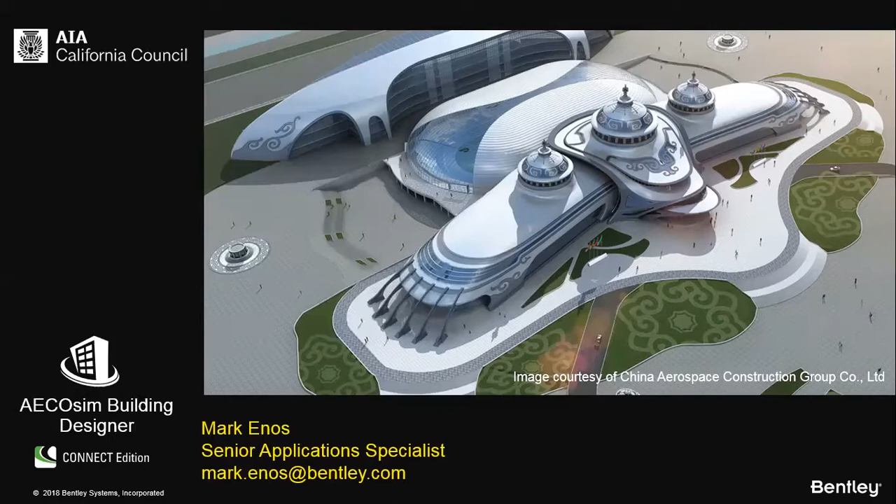So our member benefit program is pricing. It's open for new and existing users. For new users, you get 25% off. There is a select cost involved, which is maintenance, so you get 25% off. The list price is $5,501, so that brings it down to $4,126. And then if you buy two and get one, you do pay the select on all three for the maintenance. So that's for new or existing users for that whopping discount of over $5,000.

With that select maintenance, that includes 24/7 technical support. You get free software upgrades. All of our online training on demand is complimentary for all Bentley products, so if there are products you just want to play around with, you can go into the training. We also have complimentary instructor-led virtual classes for AECOsim, which is our BIM product, that are AIA continuing education registered. That's only for the live classes, but all those quick starts are offered on demand.

Part of Select, you also get a version of LumenRT Designer, which I'll be showing in a few moments, that is embedded in AECOsim Building Designer. You also have the benefits of our connected services with project collaboration, adaptive learning, and personal mobility, which you'll be seeing in a little bit.

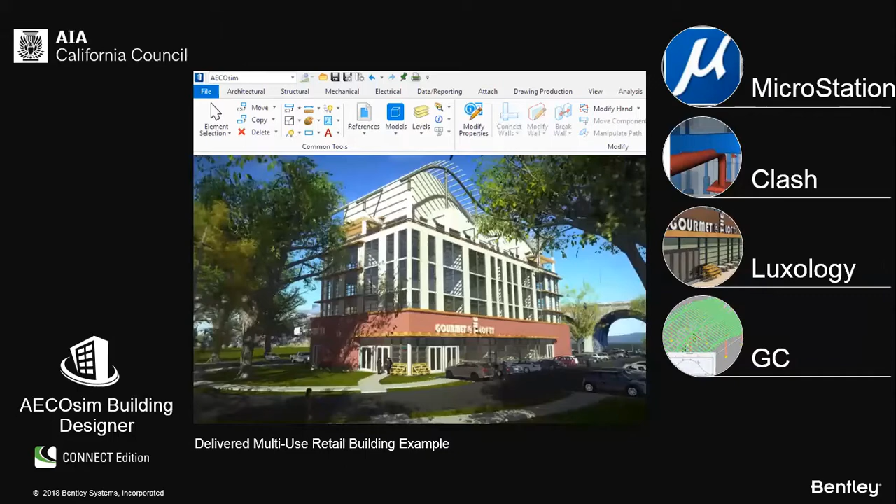When you install the product, we have some companion products. One is called Descartes that does raster to vector and point clouds. That requires another license, but it will run inside of AECOsim. We have Generative Components, which is complementary with Select, and that's optional during install that you can add later. Then LumenRT Pro, which I'll be talking about - that's an optional install that works with other BIM solutions, but as a member of our Select program, you get a light version of LumenRT with limited libraries and capabilities, but it's a great tool which you'll be seeing.

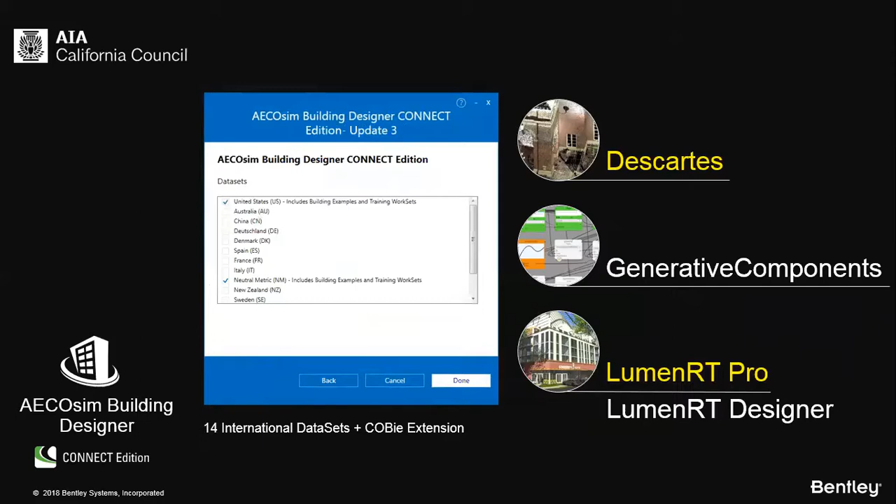We also have 14 international data sets and the COBie extension, so that's if you're doing any overseas work. A lot of countries now require BIM deliverables and they have their own standards, so we support all of those. AECOsim Building Designer is scalable BIM.

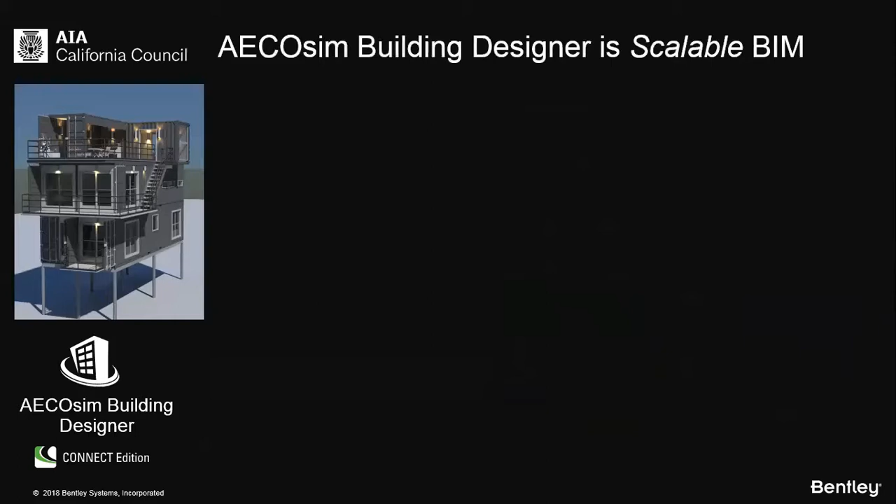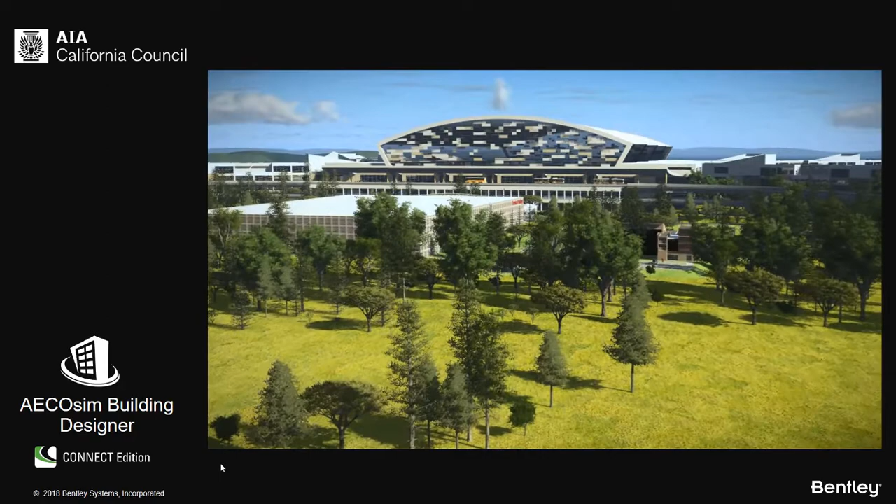I'm showing you all these big projects, but it is scalable to smaller projects with unique geometry, and scalable to large projects such as an airport where you have multiple buildings. In this example, AECOsim is used for the terminal buildings, the garage, and other buildings, while there's open roads, open rail, and other Bentley products, and this is all in LumenRT.

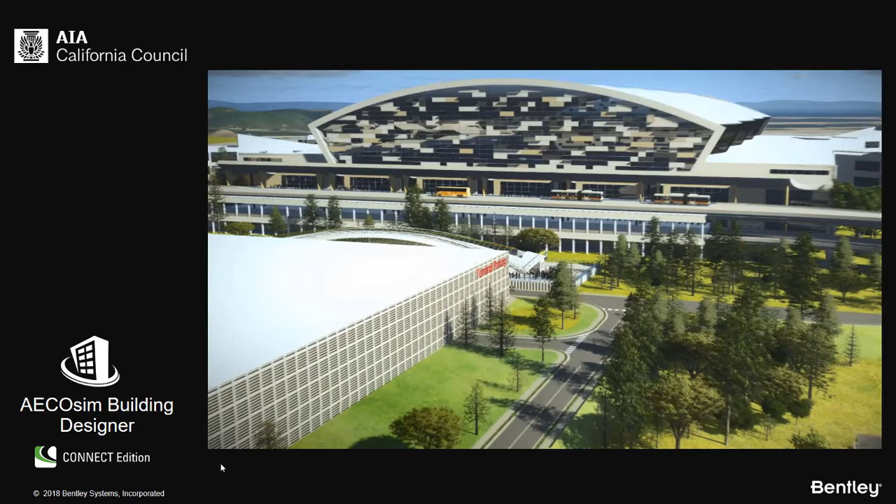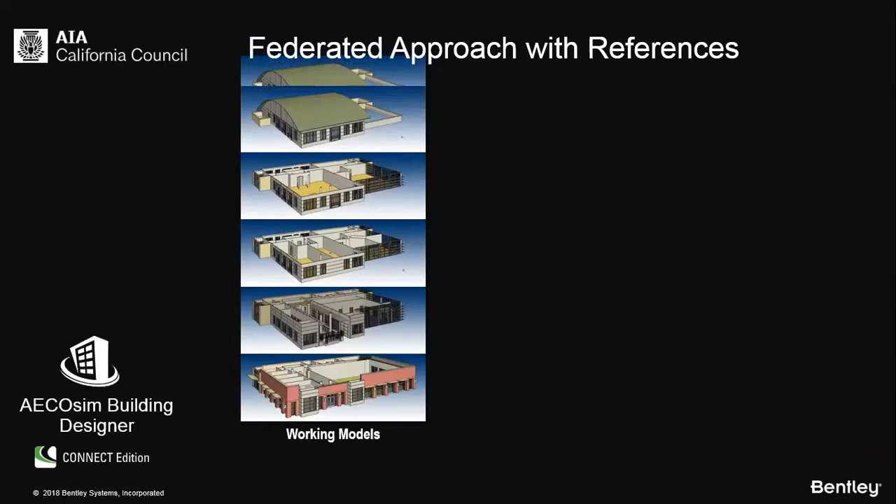The way that we construct the models is through a federated approach. We typically break them up by floor and by discipline, and then we reference them together similar to an Xref, completing master models, creating our drawings, plans, sections, elevations, and all of our reports and schedules.

The actual program itself can be standalone, or it can run on a network environment with the cloud, the LAN, or the WAN, and you can be managing your own in-office configurations and standards, or if there's a client standard workspace that needs to be followed, you can be doing that as well.

What else is unique about Bentley is that our file format, the .dgn, has only changed once in the last 30 years, and that was to work with DWG. Think of our file format that we write all our models and data to as maybe a PDF - you're always able to access it. We changed the program and the workspace, and that's why owners like it, because they can always retrieve their old data.

So if we try to open up a file from 1992 that was in our old format - we only have two, version 7 and version 8 - if I try to open up an old file, it'll ask do you want to upgrade it to a new version, or do you want to keep it as version 7 but just open it read-only, or you can reference it into a new session and copy graphics through. So you're always able to access your old data.

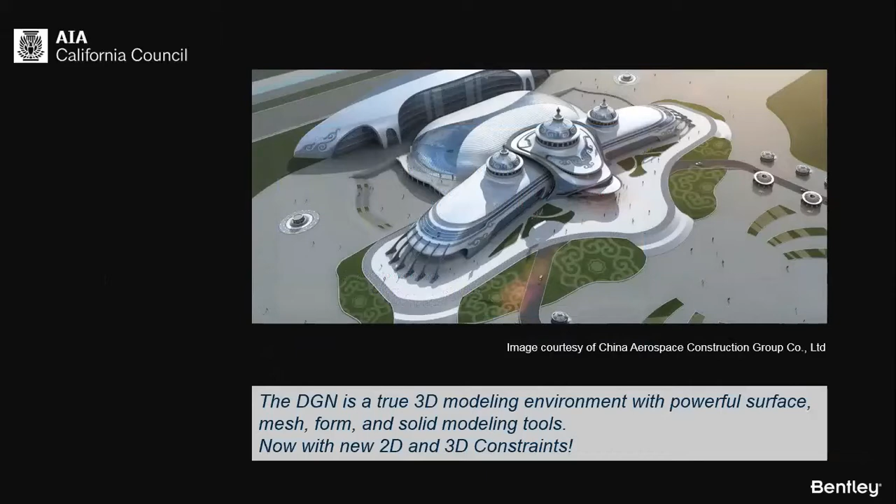The DGN is also powerful when it comes to the 3D modeling environment. We have powerful tools for surfaces, mesh, forms, solid modeling tools, and we have new 2D and 3D constraint modeling. When it comes to interoperability, that's a reason designers like using our tools - it's the modeling capability.

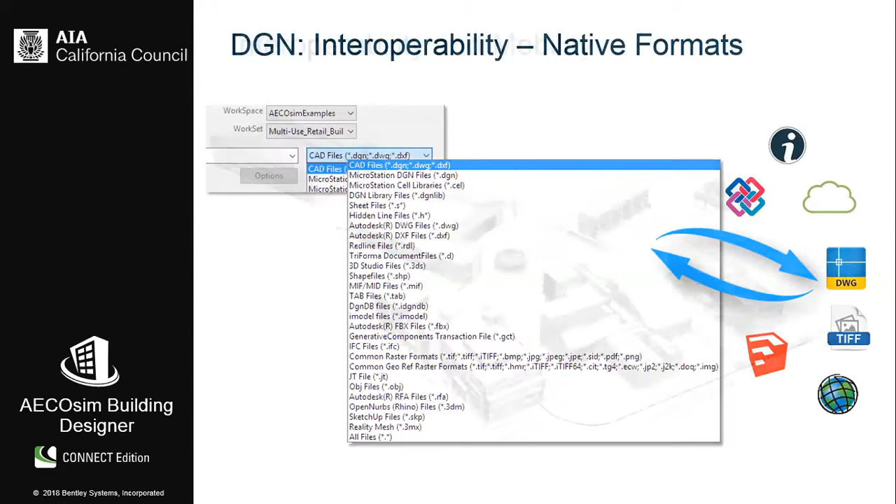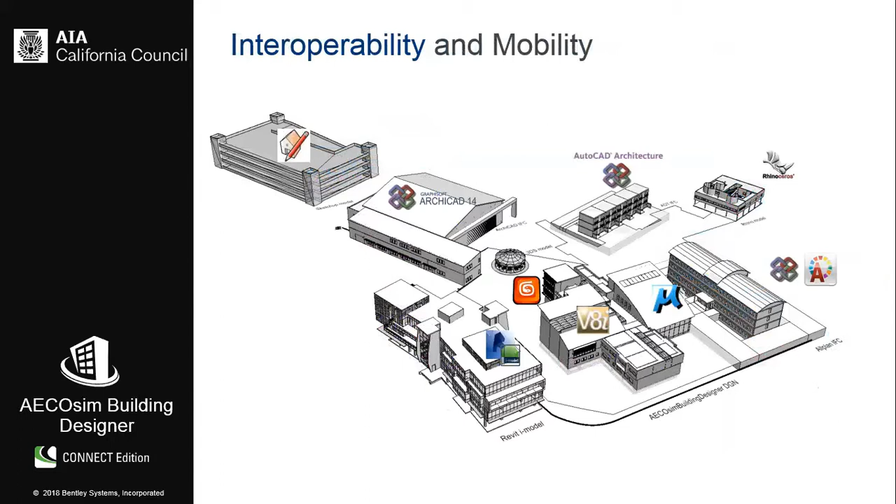We're also very interoperable with many other native file formats that we could be opening up - SketchUp, IFCs, we have a plugin for Revit. So here you're seeing that we could be bringing in these other BIM models - ArchiCAD, Revit, Allplan - either through IFC, we can bring in SketchUp and other file formats using iModels, and we also support COBie as I mentioned before. In this little structure, you're seeing some objects that were imported in - we can bring in DWG blocks, MicroStation CAD cells or blocks, OBJ files, SketchUp, 3D Studio Max, RFA which is Revit families, and we can be adding data to them as well.

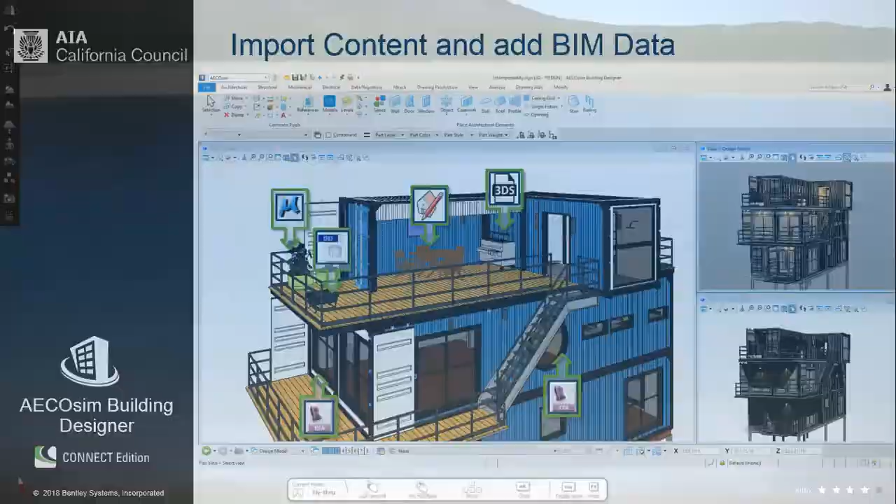And here we can take our container building into LumenRT and put it along a beach with a swaying palm tree. You're able to see all that content that went through our new labels in LumenRT, where we could be labeling parts of a model. You'll notice the animation on the flat screen up on the top of the deck, which really enlivens your BIM models with LumenRT.

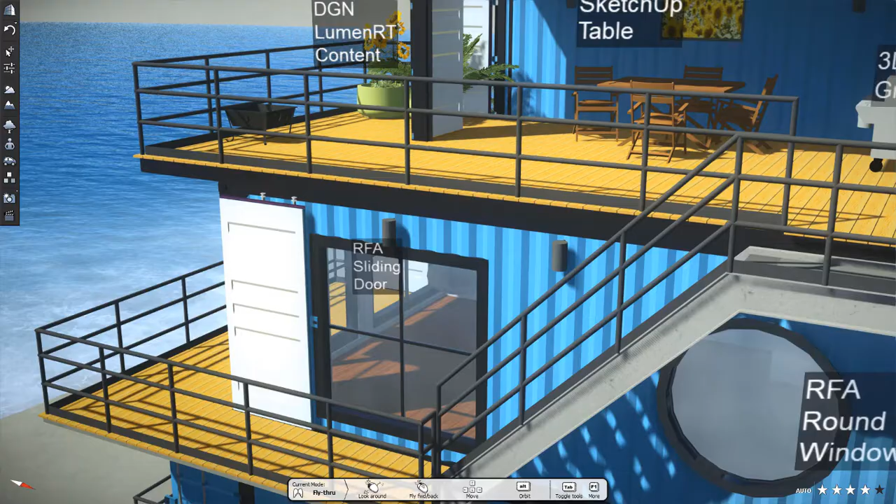We can also attach point clouds to a DGN so that we could be doing hybrid modeling with AECOsim Building Designer, keeping the existing conditions as point clouds, and we bring in multiple formats of point clouds into our design sessions.

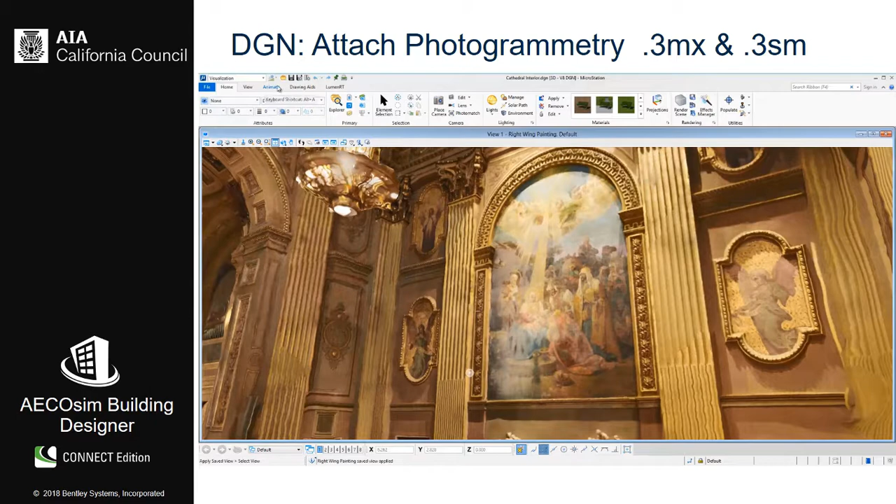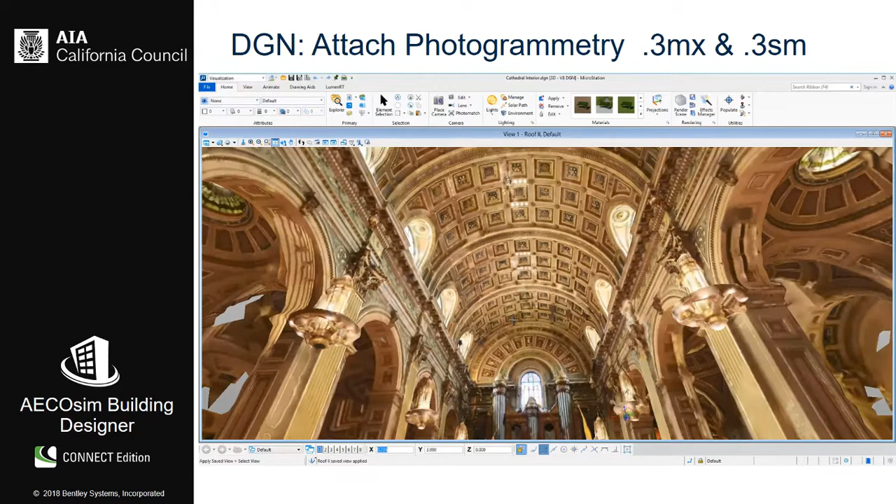We also support attaching photogrammetry from ContextCapture, 3MX and 3SM files, which is great for historic preservation. This is a cathedral in Philadelphia, a mesh model created from photographs, and we can work in a hybrid environment of new and existing.

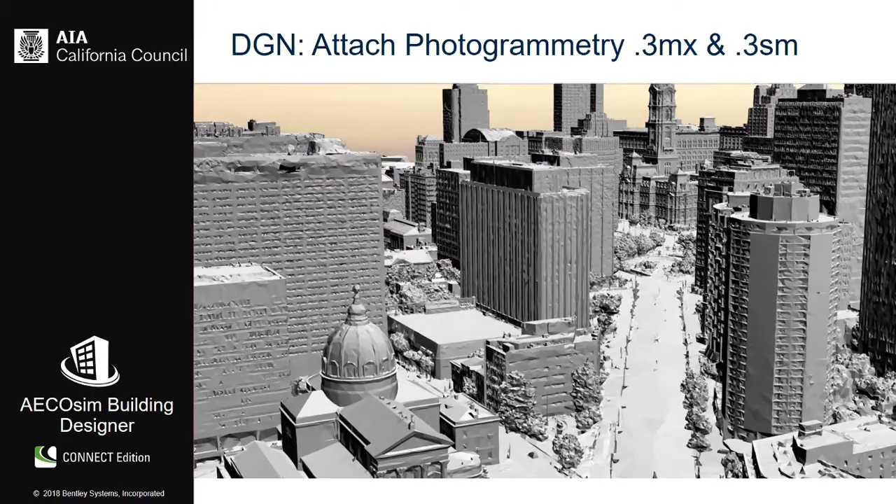Or for landscape or urban design, you could be taking drones. This is Philadelphia for the Pope's visit several years ago, where a government agency approached Bentley and asked them to make a 3D mesh model of downtown Philadelphia so they could plan and control the crowds around the procession route. So you're able to bring a mesh model into AECOsim and model barriers, stadium seating, emergency routes or things like that, or propose new buildings with it as well.

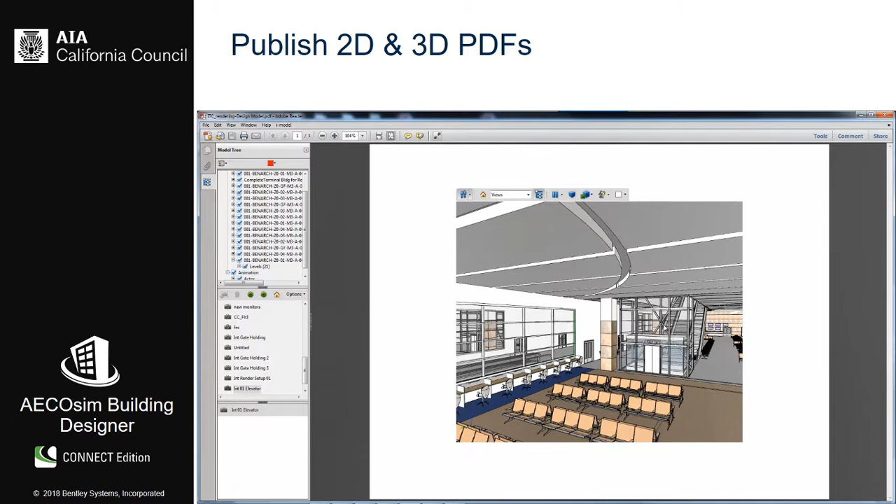We also have the ability to publish 2D and 3D PDFs directly in AECOsim Building Designer with the Adobe drivers. So a 3D PDF, if there's an animation in the file, you can capture that. You could change the display styles of the 3D PDF after it's published, and go in and turn off items in the model. This is a great tool if you don't have any BIM tools to navigate through.

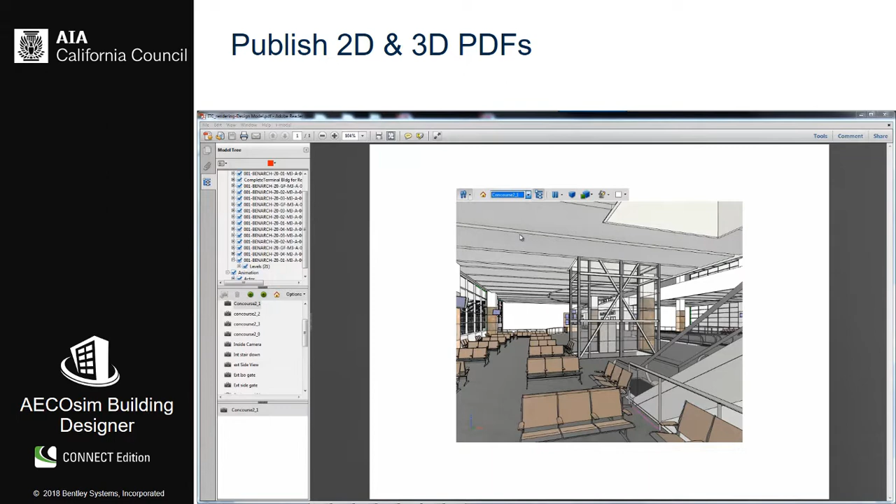We could be jumping to saved views of the model, so this is something that's very portable. You could be emailing it to your consultants and clients for them to review the 3D models.

And then when it comes to AECOsim, it's a new version. When you launch the program, we have a welcome screen with videos and example files I'll link to, so you can learn about the interface and the new tools. The welcome page also shows you where all the learning is, and has all the news and announcements on the page as well.

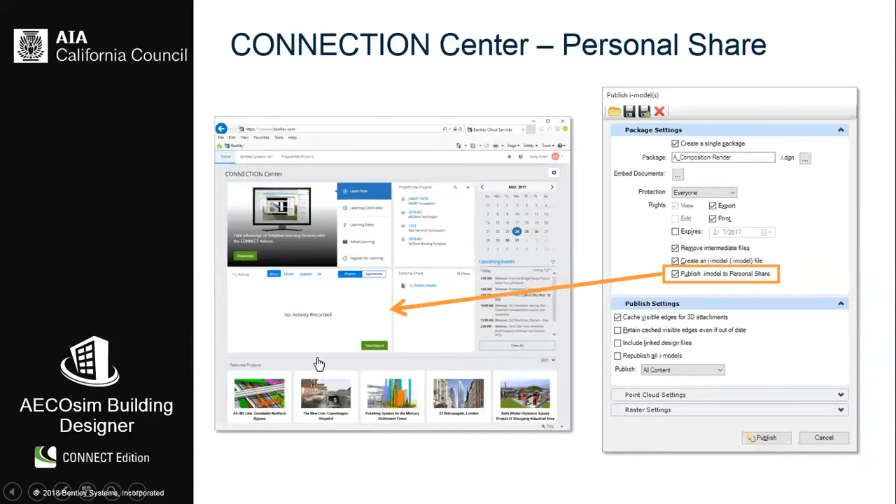When you go into AECOsim, you're asked to sign in as a connected user. With this connected user, you're linked to a CONNECTION Center, so when you go to print or plot, make 3D PDFs or iModels, or go to your personal share space, you can access it anywhere, even on your mobile devices.

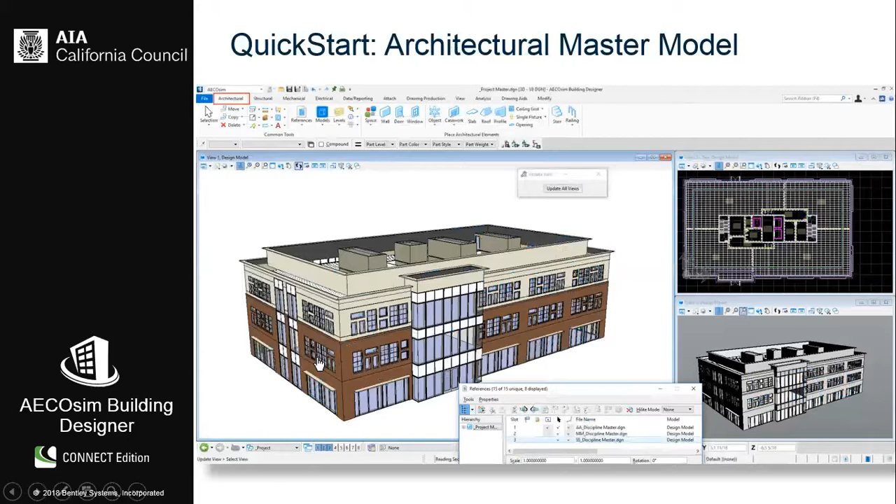So looking at the architectural model after 3 days of 2-hour sessions that you'd be going through, and then the structural model, the MEP models. When working in these models, we can also reference each other's disciplines, and we have the ability to take the structural model and make it transparent.

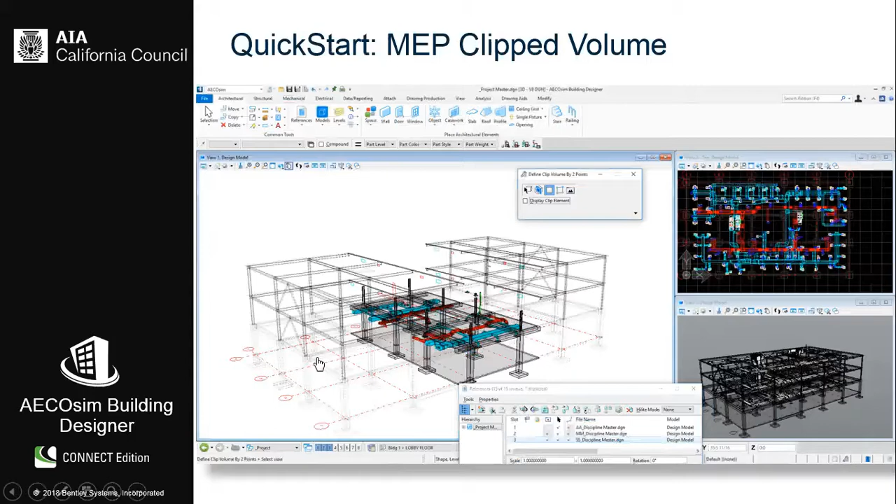We can do clip volumes, and you'll see we have up to 8 different window views, so you can have different views in different windows. If there are particular areas of interest you're working in, you can see just that area, but in context to the whole model, and we can also change the display mode of the outside of that model with a light wireframe.

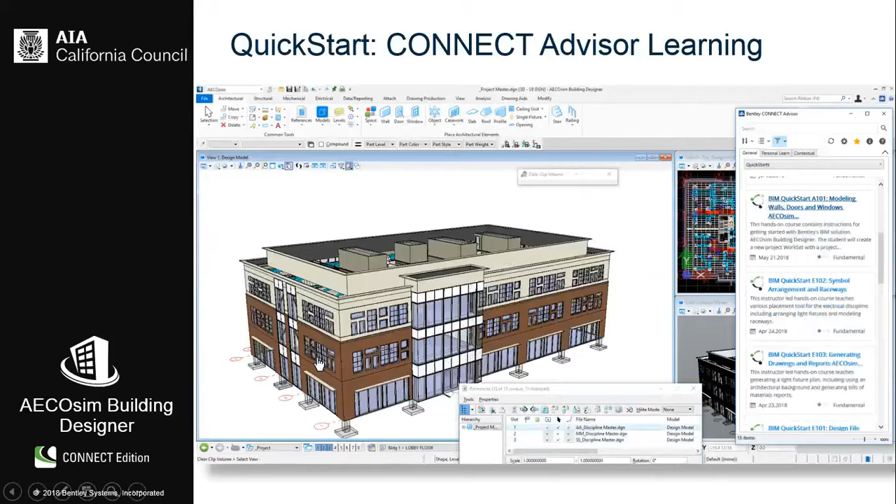Within the product, we have something called CONNECT Advisor, new in our new version, where once you're logged in as a connected user, you're presented with all the upcoming events and calendars, and you could be searching on any tool or information. It'll link you to all of our Learn content, our Bentley communities, YouTube, events, and news and announcements. What's great is if you're looking at quick starts, you'll see the recorded quick starts I mentioned before.

You just click on it and it will start playing a live session inside of AECOsim Building Designer without having to get out. And what's really great, this is a 2-hour class, but everything is broken up by exercise. So if you ever need to go back in and look at one little thing, you don't have to go back and watch a whole 2-hour video. It's all broken up in just a few minutes, and there's a project workbook as well.

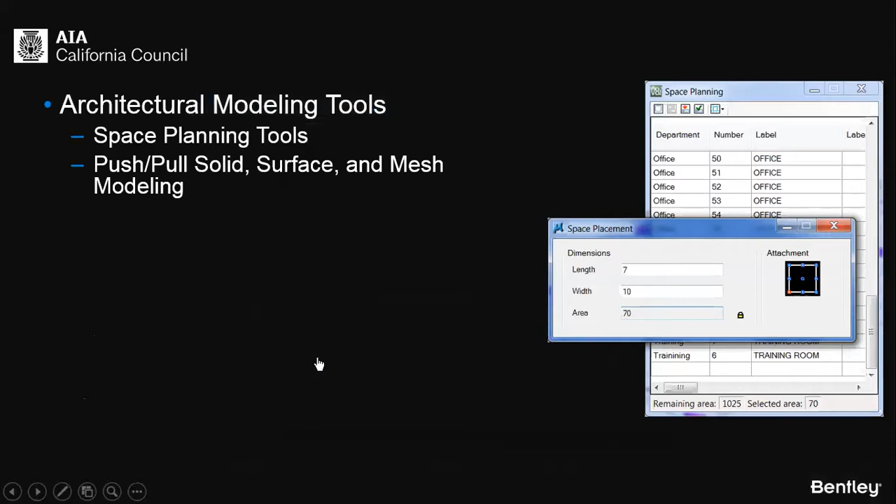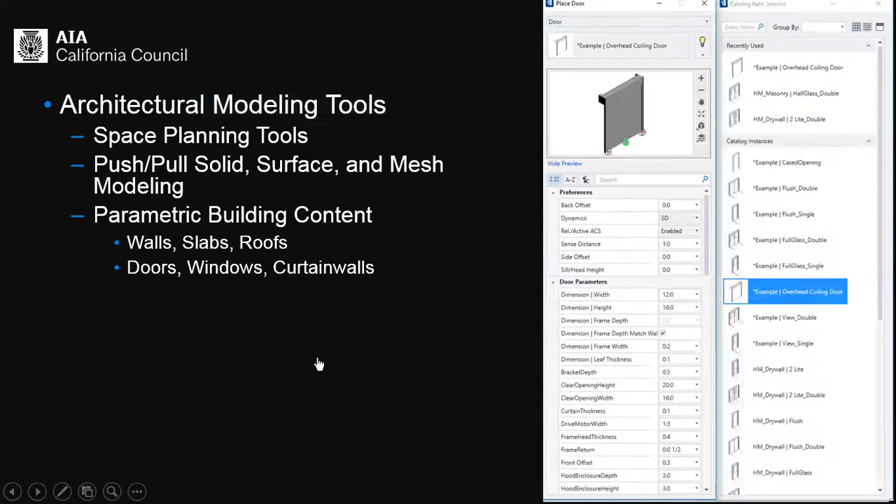When it comes to the architectural tools, we have all the space planning tools, push and pull solid modeling tools, parametric building content of walls, slabs, roofs, doors, curtain walls, ramps, stairs, escalators, handrails, and much more. Furniture, fixture, and equipment, casework, and intelligent objects that can be brought in from manufacturer's content. And we also have grid tools.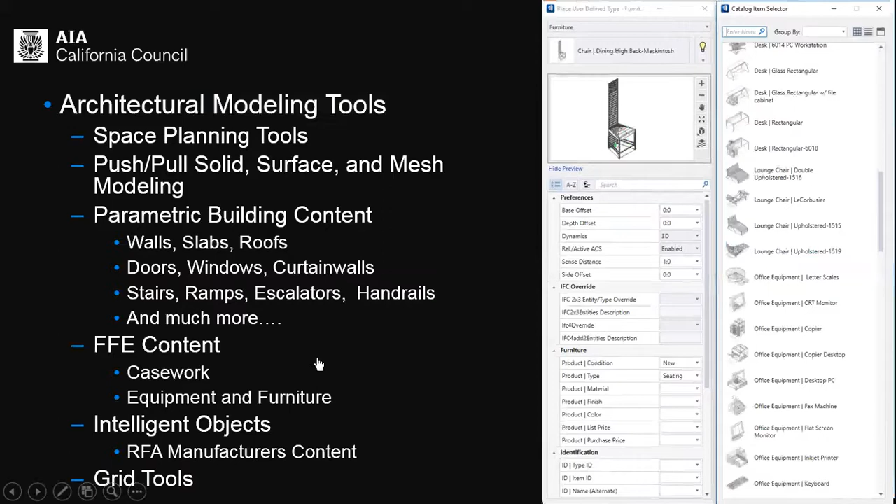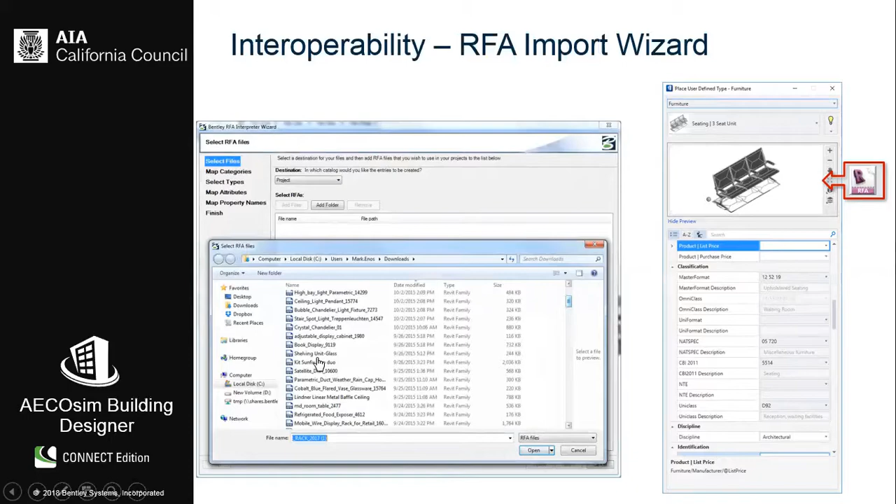So on that manufacturer's content, a lot is out there on the web. This is a website that you can download the seating from, and they support many different file formats, so we can bring all of those in. So either 3D Studio Max, AutoCAD, SketchUp, or RFA, which is Revit. So with RFA, we're able to bring it in and we can map the intelligence to our standards. If it's something that's parametric, like a sunscreen that's parametric in Revit, it'll be parametric in our product as well. So we can consume those libraries. It doesn't matter which version of RFA content out there on the web it's bringing in.

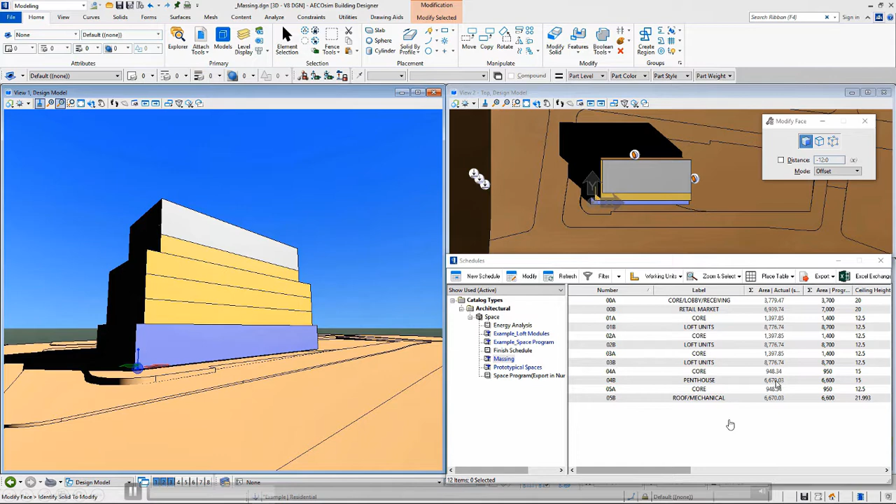We can also do intelligent mass modeling. So when we go to push and pull, the square footage of the areas of the buildings are automatically updated. So in this example, we have the top floor of a penthouse. We have an actual square footage and the program area, and it's off by a couple thousand square feet. So in this early massing study, I can go in and manipulate the faces, the edges, or the vertices of a solid. And as I pull it back, down at the bottom right, the square footage is adjusting to be closer to the program area. So as we change the mass, the square footage is automatically updating.

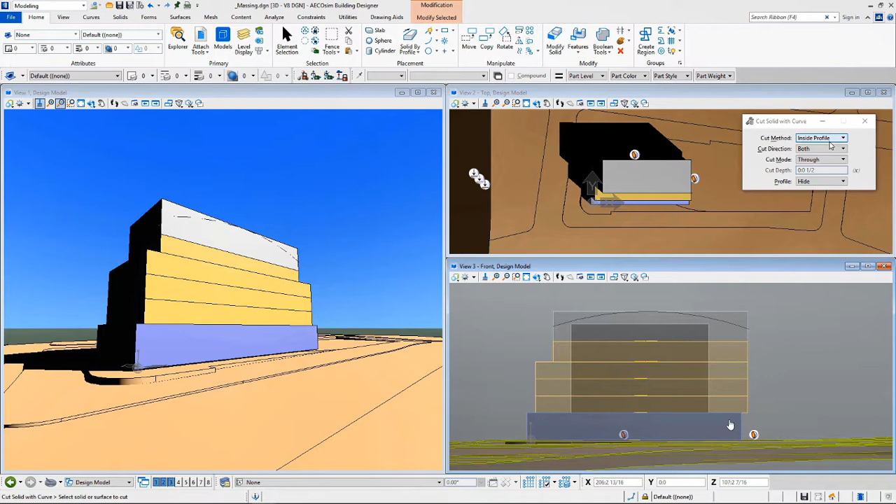And then within this, we can also do some further manipulation. We can go in and put an arc for the roof, and then use our solid modeling tools for cutting and carving. And so that arc I've just placed, I'll take that top massing and subtract.

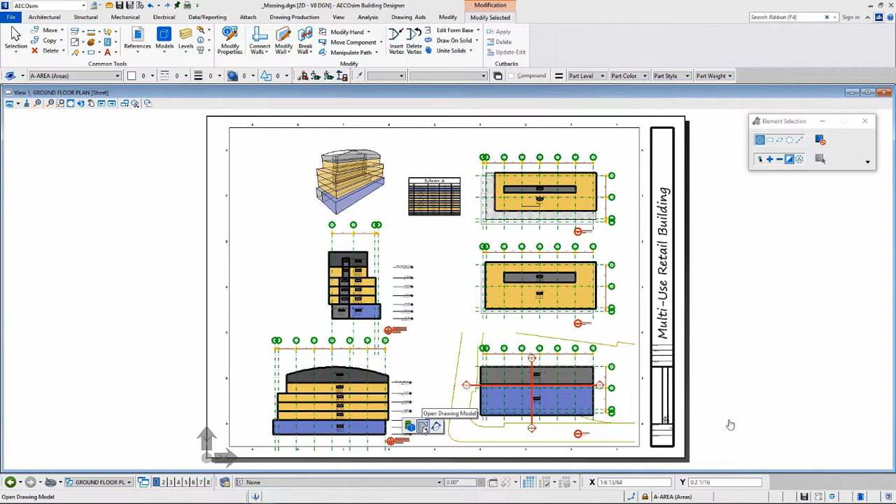And then in this same file, I have my plan sections and elevation of this massing, along with a schedule of the square footage of the different floors and areas. And it's automatically placing the columns in as well, but you'll see as I manipulate the model, the square footage of the different areas automatically updates. And the drawings are linked back to the 3D model. So if I go to one of the callouts, it will take me from the drawing, the sheet, back into the 3D model. And we'll be looking at that later. That is hypermodeling, an option where you're able to go back and review your drawings automatically linked back into the model.

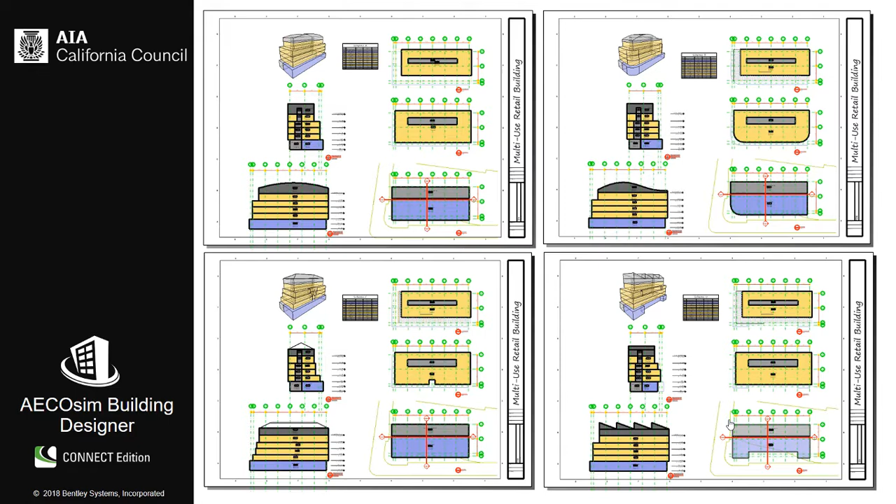So we could take this file, copy it, and make further modifications, so we could be looking at different design schemes. So very quickly, you could start off with one massing study, do a save as, and then explore different roofs or setbacks of the building or curved corners, and all the square footage of the floor plates are managed and linked together, so you're not going back and forth between Excel and a massing program.

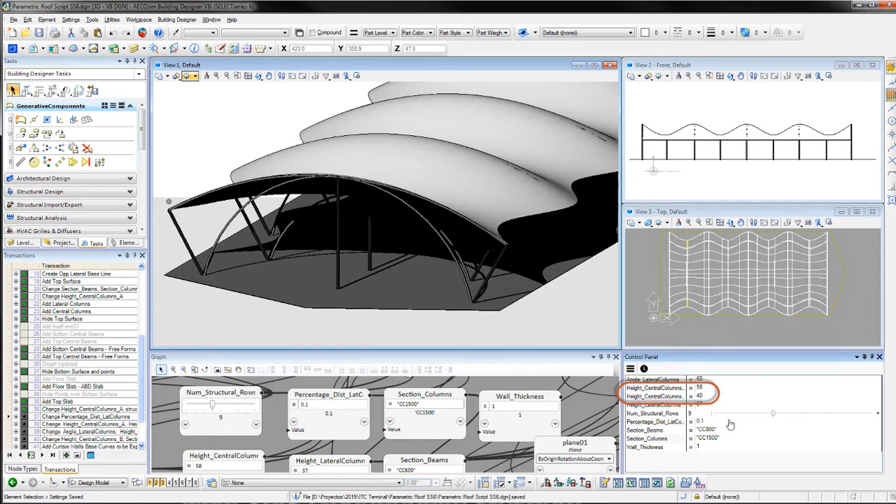So if you're looking at doing GenerativeComponents, this is an example of computational design, of having a design scheme that you want to rapidly look at different alterations or iterations of. And that is with our GenerativeComponents. So basically, rather than Bentley telling you how relationships are, you can go in and set up your own relationships between the structure, the roof, and the curtain wall.

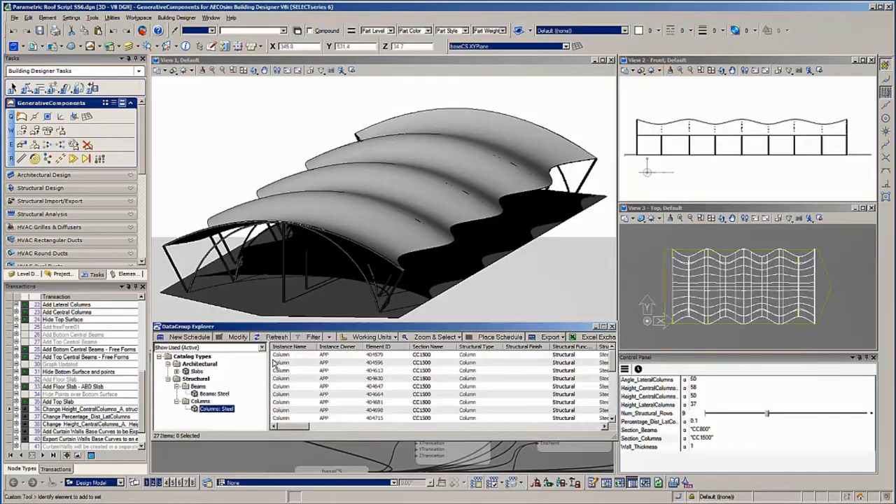So this is an example of going in and adjusting the bays of the structural system. We have sliders that you can adjust. You can grab it by points in the model, and you'll see how the roof and the structure are all linked together as I make that change. It's all recorded in these scripts that are driving the BIM geometry. So when I go in and look, these are real intelligent BIM objects, the beams and the columns that you're driving geometry for. You could also be driving walls, and through multiple files, it will update.

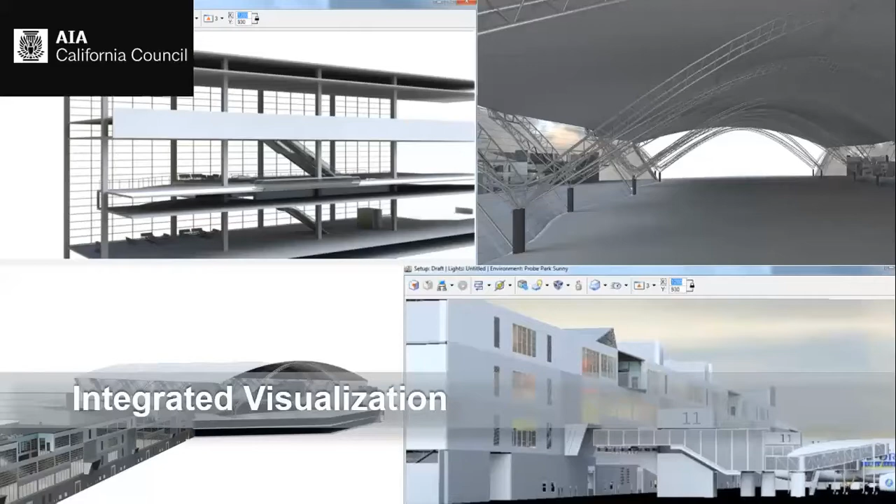We have integrated visualization. So even in early design schemes, you see that you can take your models and make them ambient occlusion, which makes all the materials go away. If you're showing a client, we don't know what it's going to be. We just want it to be either transparent or soft.

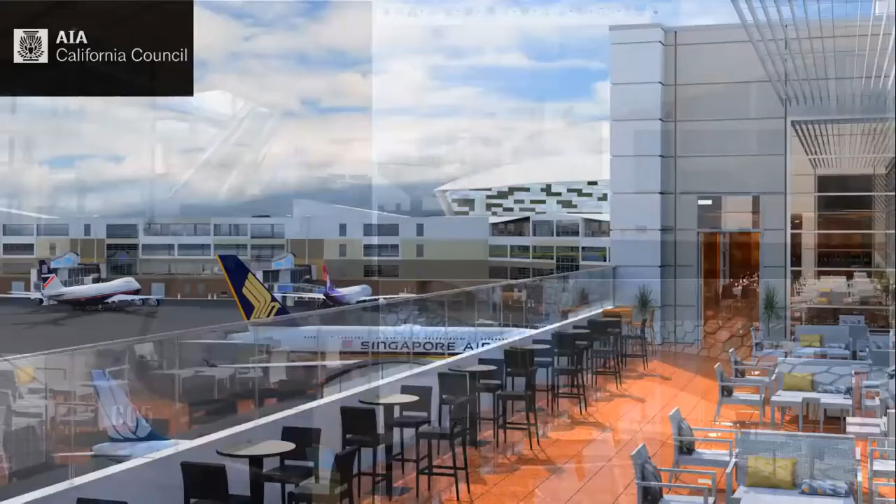And then moving through design development, this is pretty much all rendering out of the box with no fancy rendering techniques. But then once you get more complete, you're bringing in more content. This is what you're able to achieve with the rendering that's built in, without having to go into another program.

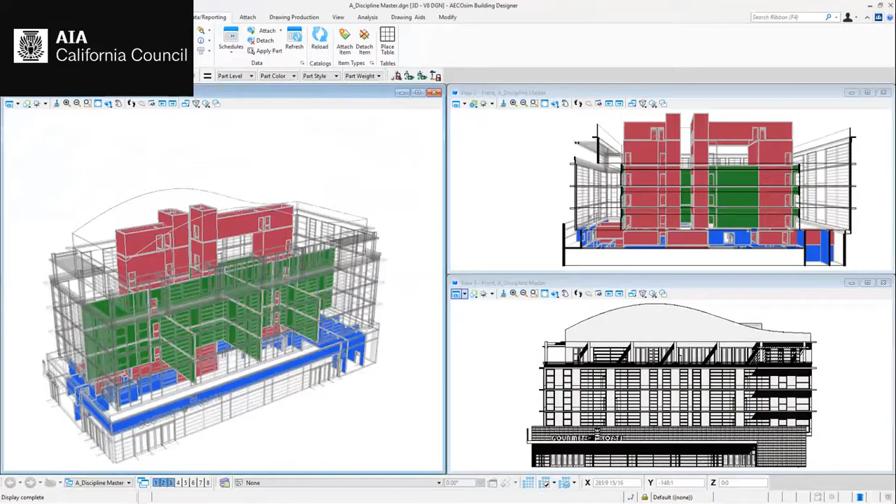When it comes to visualization, we can also visualize data. So in our models, we can have it visualized based on the intelligence on the object, the business data. So you could say, show me the rated walls color-coded in my model or my drawings. So you're able to quickly look at that.

Or in this example, in our first floor retail, we have fixtures, and based on the intelligence of the objects, we can have it color code in the drawings and the model what is movable and what is fixed. And then we can do a schedule from that.

When it comes to our models creating drawings, we have something called hypermodeling. Basically what that does is it links the drawings back to the 3D model. It is optional. You're able to take all the graphics in the 2D sheet, but it still links back to the 3D model.

So you're able to really understand how the drawing is expressing where it was cut in the model, or if you're deciding maybe it needs to move. It's just a great way to see how your drawings are derived from the model. A lot of times owners say they want the model and drawings, but there's no way to really see how they're tied together. So we can go from the sheets back into the model.

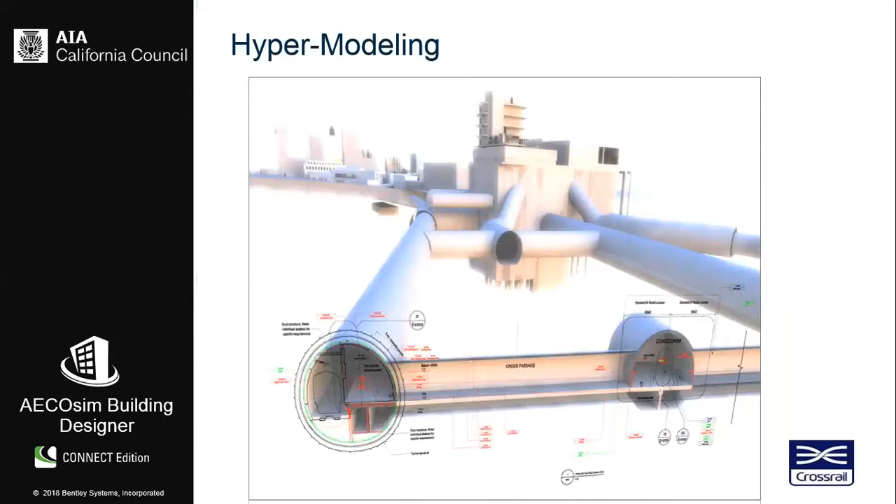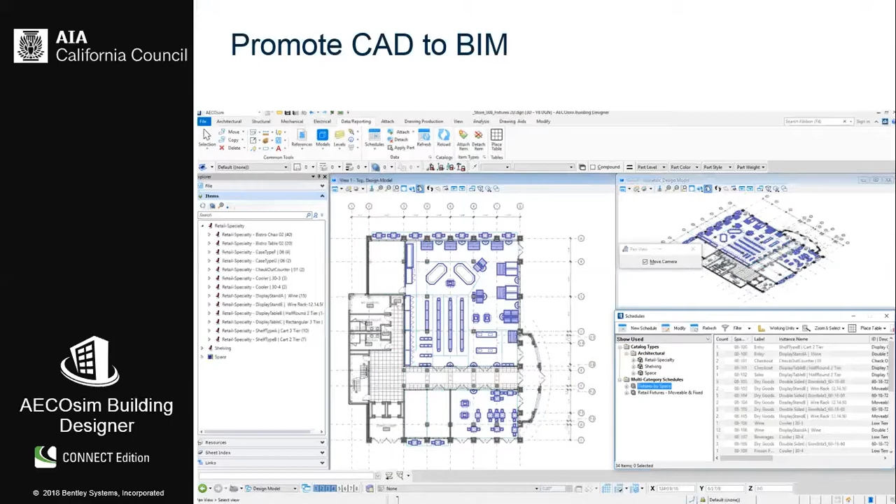And down at the bottom right, all we had is a closed polygon, which we call a space, that has spatial containment. So you can report on which fixtures are in which space. We have a lot of owner operators, large retail companies, that are using BIM for their 2D interiors. They just care about sales square footage and fixtures, not about the exterior shell of the building. They care about the inside.

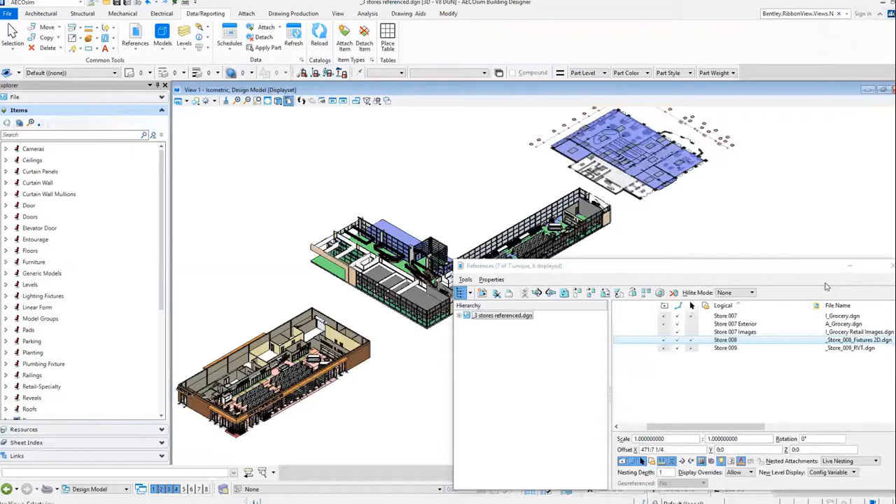So we can also use this between multiple buildings. We're in an empty file referencing; the upper right is that 2D building. The center one is a Revit model that we brought in and started putting our fixtures in, and the third is AECOsim. So from that, you're able to run reports, create drawings, make edits and changes between multiple buildings. Again, another reason why owners like to use our software.

Just to explain the difference between Lumen RT Designer and Lumen RT Pro. I could send you a link to look at the differences in the amount of library and functionality between the two. Lumen RT Designer is embedded in AECOsim Building Designer. Lumen RT Pro is a separate add-on product that works with Revit, SketchUp, ArchiCAD, and more. But it has the basic principles.

And Lumen RT Pro can create an executable LiveCube that you can give to consultants or clients without them having any Bentley software. So it's just an added benefit.

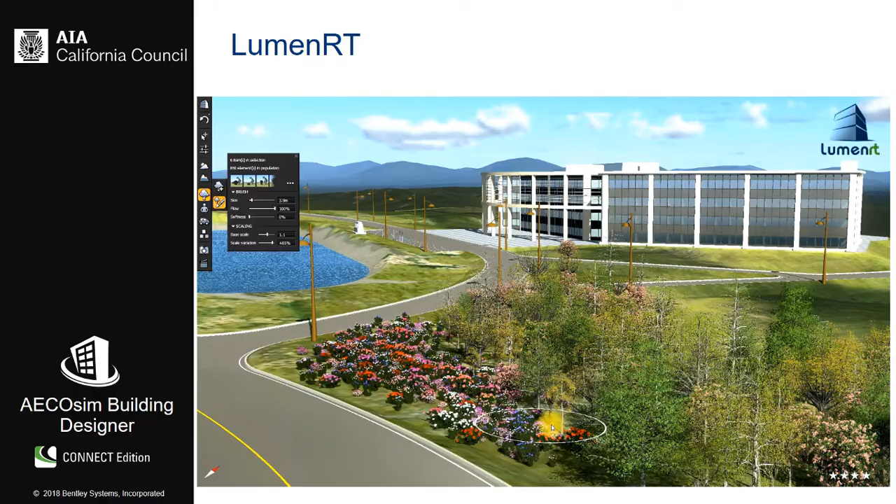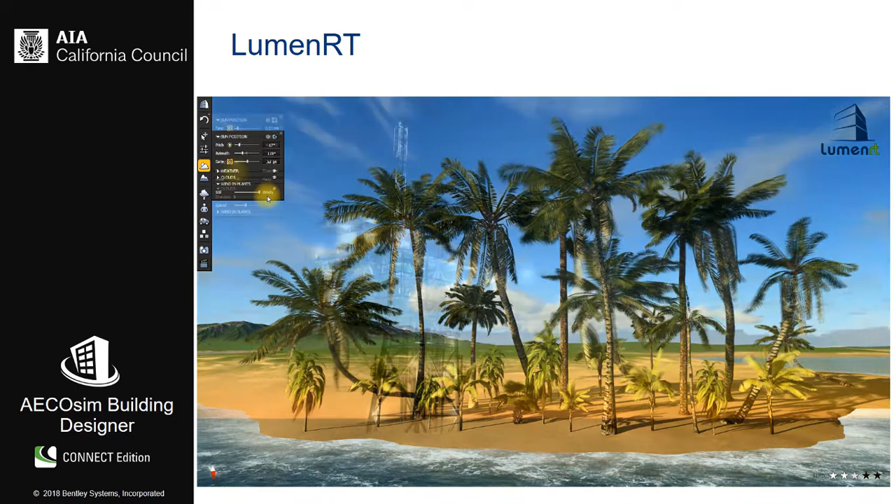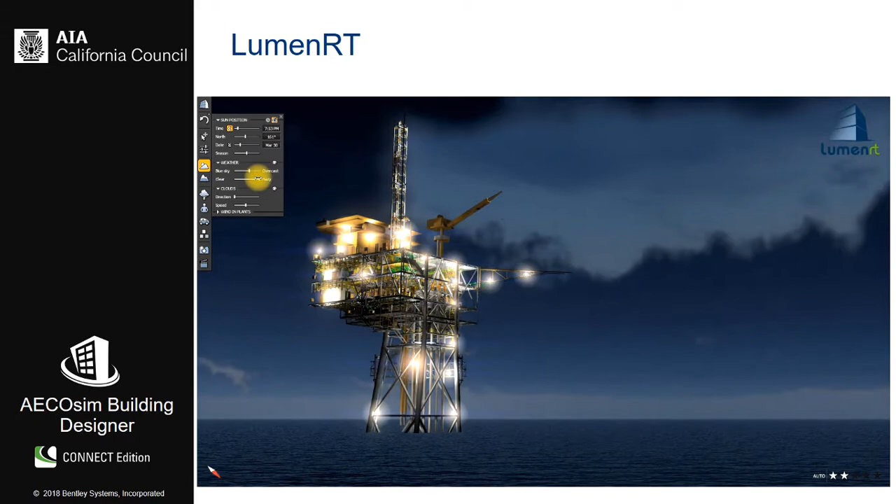And then this is LumenRT Pro, some of the capability of being able to paint the plants, set the season, and here we are adjusting the wind. So it's just an easy to use tool that's a lot of fun, bringing your BIM models into this enlivened environment. We could also do night scenes.

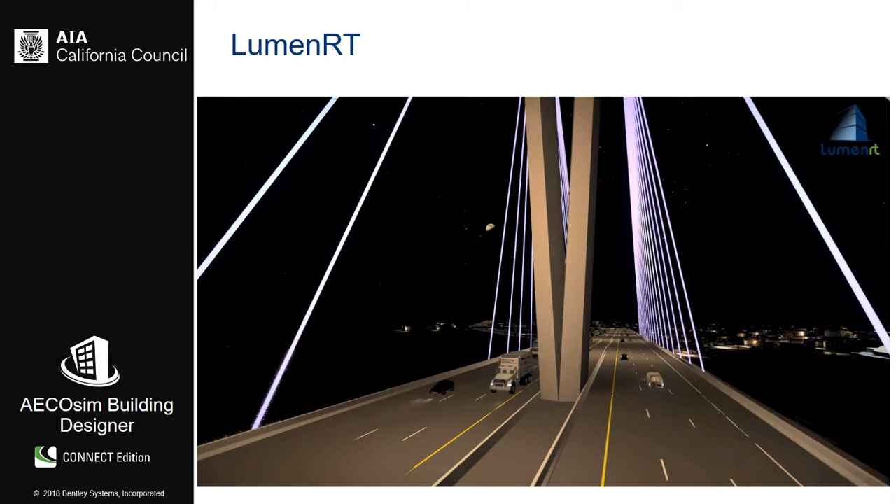And fully adjust the lighting. And you can change all the materials as well. It's linked back to the model. It'll remember if you changed it in LumenRT.

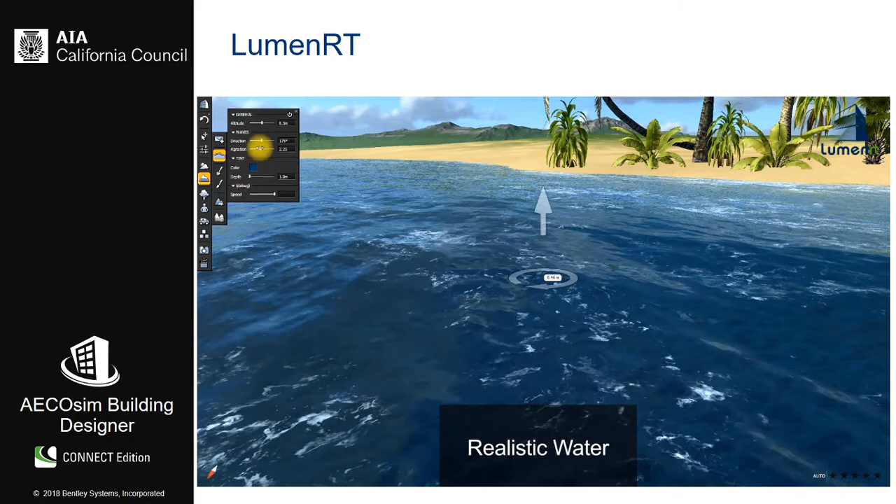And here's built-in terrain sculpting. So you could be making mounds, you could be making holes in the ground, adjusting the water. There's also fish and birds that can be in this scene, as well as many objects of people, cars. And here you're giving custom animation paths. It can be people or cars as well.

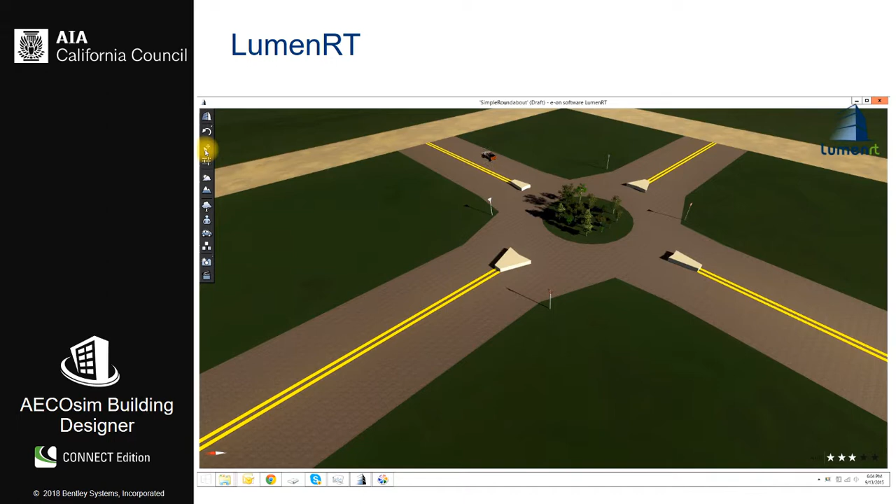And the content library, again, in LumenRT Designer is not as extensive. You get the full catalogs, and you could be bringing in objects into LumenRT as well.

Okay, and now I think we're going to hand it over to Atsushi. Okay. So I don't have the control. Okay, I got it. Okay, going back.

So my name is Atsushi Sugiuchi, and I'm working for Morphosis as Advanced Design Technology Group. And so I'd like to start with a little bit of introduction for Morphosis office. So we have 3 offices, and we have an office in LA, and we are like 30 people working on it. And the New York office, we have 12 staff members, and then Shanghai, I think it's 2 members there.

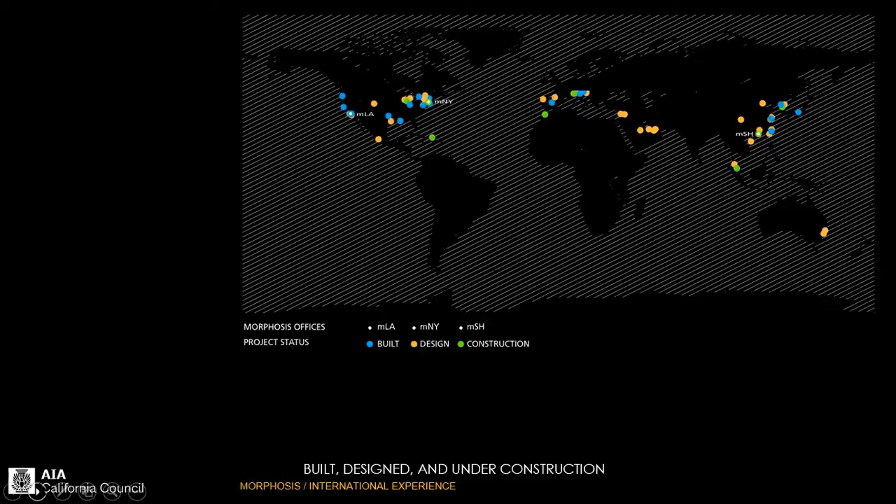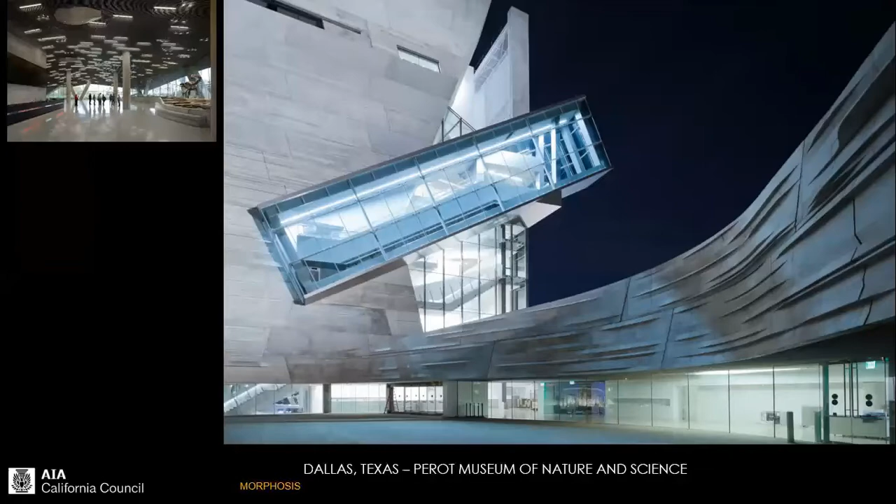And then our projects, those are the places, and it's all over the world. And these are the projects that we do, and all of the projects we are using AECOsim Building Designer. So, these are the current projects that we are working on. Some are recently finished. This is a museum in Dallas, and some cladding towers.

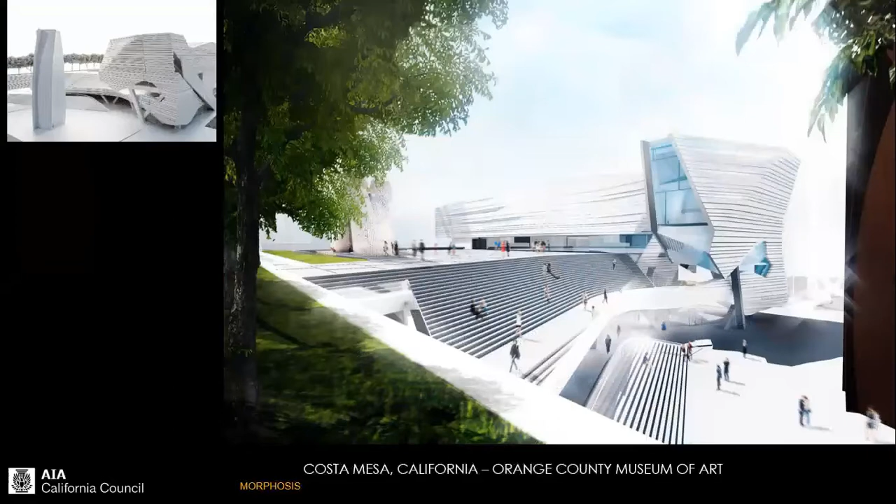This is the facade recladding project and aluminum rain screen cladding, and the stainless steel perforated panel screens. This is the Kolon Future Research Project. It's in South Korea, and the tower in Shenzhen. This is currently the project I'm working on in Costa Mesa, Orange County Museum of Art.

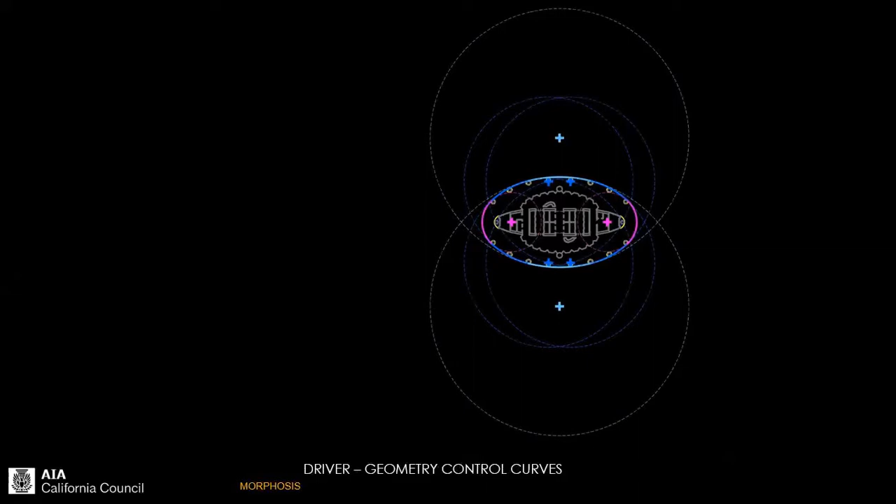So I would like to talk about the design workflow using AECOsim. So the driver, we are just rationalizing the geometry with these curves. I'm using a project in Singapore as an example. So there are 8 curves. So we just rationalize it in 2D, and we extrude it using the design surface. And this vertical line is the center line of the windows.

And then we set up the data, which is the finish floor plan levels. So intersecting with the driver file to get the work points. So using those work points, we are inserting cells. And what those cells do is those cells have 2 components, which is the flat panel and the more 3-dimensional wavy panels.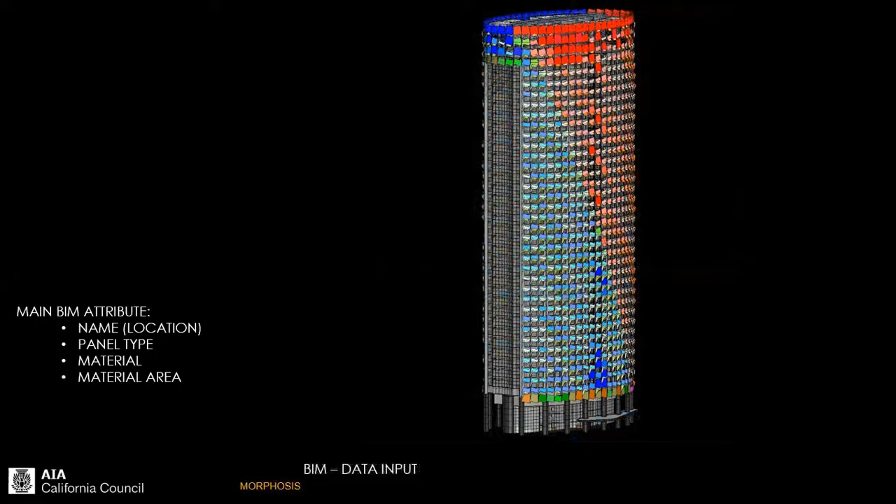So we have BIM attributes on the names, panel types, materials, and material areas. We are mainly using those names and the panel types for this project. So there are 2 types. For our design update, we often use Excel to sync wave panel types here. There are 2 wave types. An orange one, which is going up to the left, and the green one is going up to the right side. And as the color tone gets darker, the width of the wave gets wider.

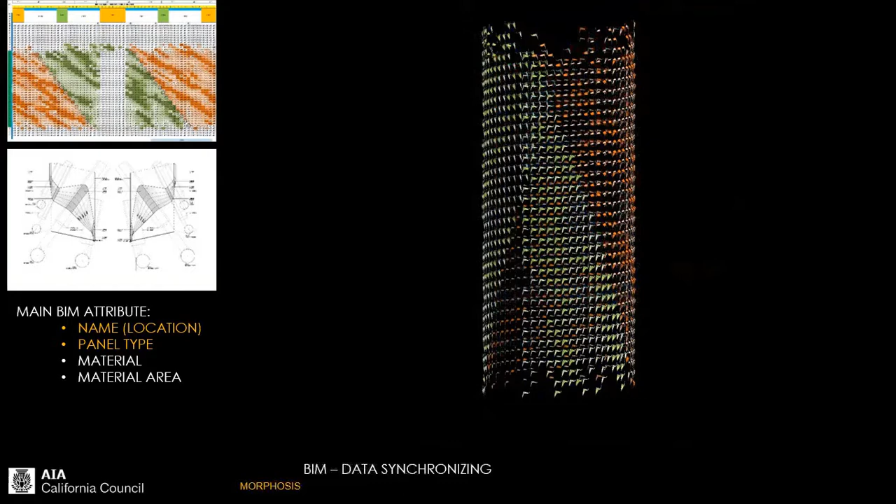It's the same way on the flat panel. Design pattern in Excel and push information to 3D and change the types. So in this project, we are just designing in Excel, which is the top left corner image. And then all that information we just bring into AECOsim. And then we change the panel types.

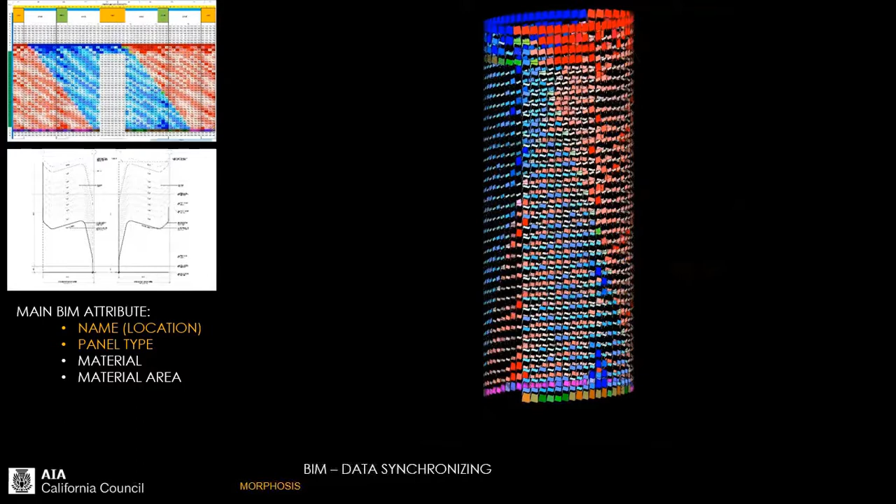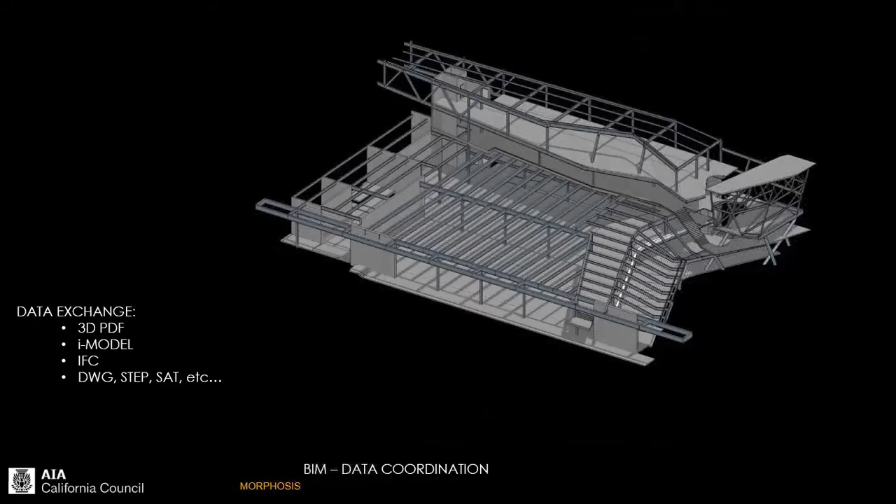For the data exchange, we are using 3D PDF. We use the i-model, IFC, and DWG, STEP and SAT files. And then structural proposals from us, and those are also coordinated with the structural engineers. And then the design on the exterior facade sometimes directly goes to the fabricator from us. So, the production workflow details.

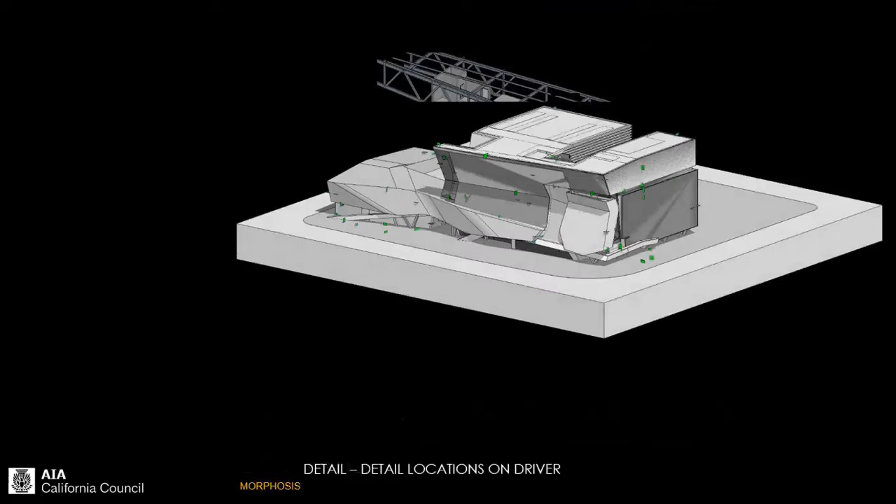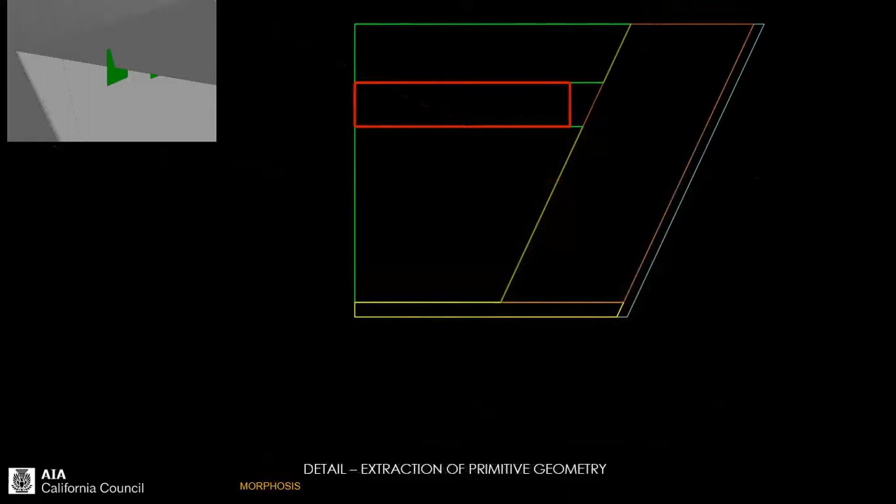We are using the driver file to locate all the detail locations that we need to have on the 2D drawing. So the close-up of this one, as an example, we have a soffit and curtain wall system interface details here. So we extract those drivers, which are low resolution, and no LOD. And then we are using those design surfaces to establish and then add more information on the design details.

And the production workflow with diagrams. The produced diagrams are for presentations, books, or PowerPoint. And then setting up a sheet for the specific use. For example, this one is used for a PowerPoint presentation.

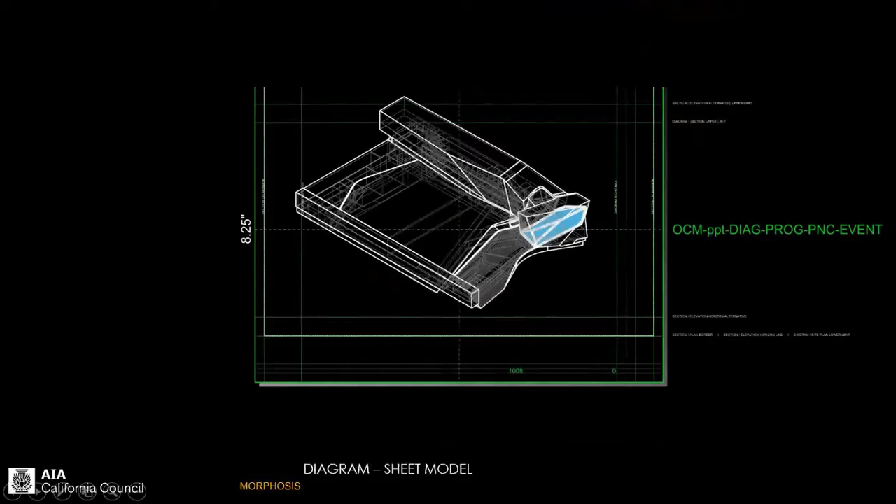And then setting up the family to get the ideal line weights, type, and colors. Also setting up the levels for diagrams. Extracted lines are pushed to one of those levels here. And the most important setup is the plot configuration for us. It depends on the presentation media. We use a different type of plot configuration file in order to reduce the post-production times.

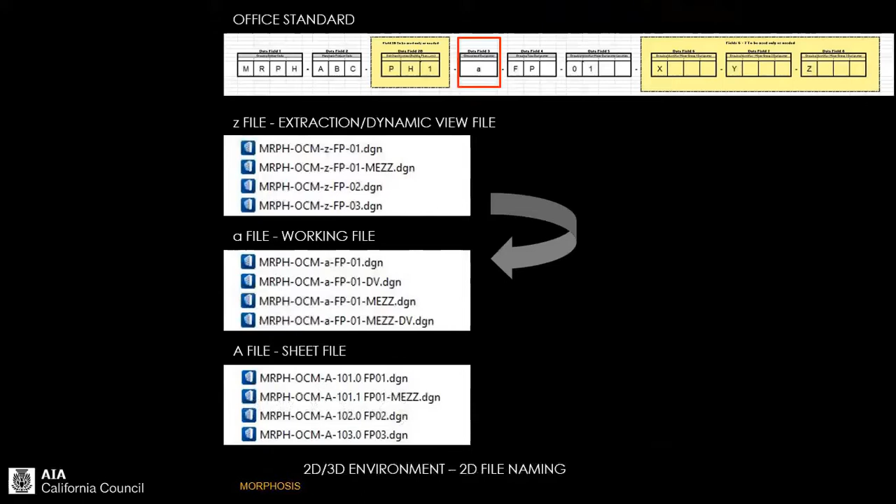2D, 3D environments. We are using AIA standards for the naming for 2D files and also 3D files. So what we are always changing is field 3, which is the dimensional designator. The first field is our company, Morphosis, the second field is a project code, and for the third field we change for the Z file, which is the extraction or dynamic view file, and the small A file, which is a working file. And those are referenced into the A file, which is the sheet file.

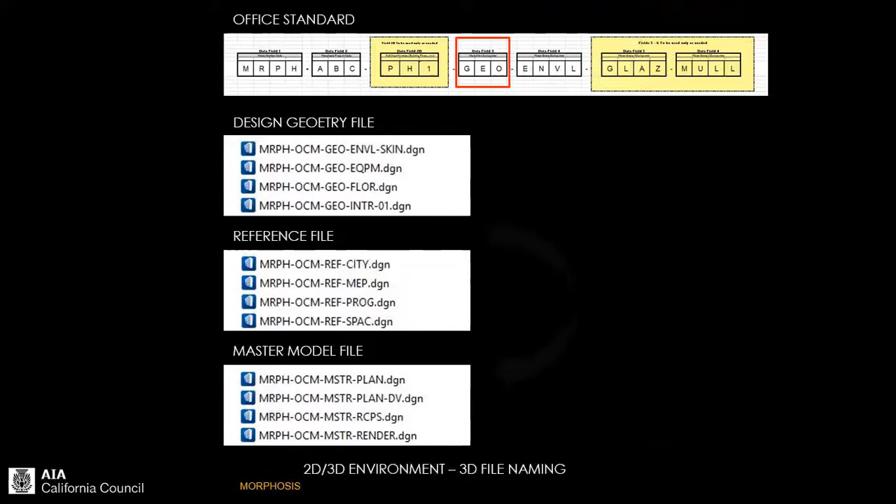For the 3D file names, we use GEO as geometry. It's a final design file. And then we use the reference file as a reference model from MEP and structures. And those files are referenced into the master file to extract.

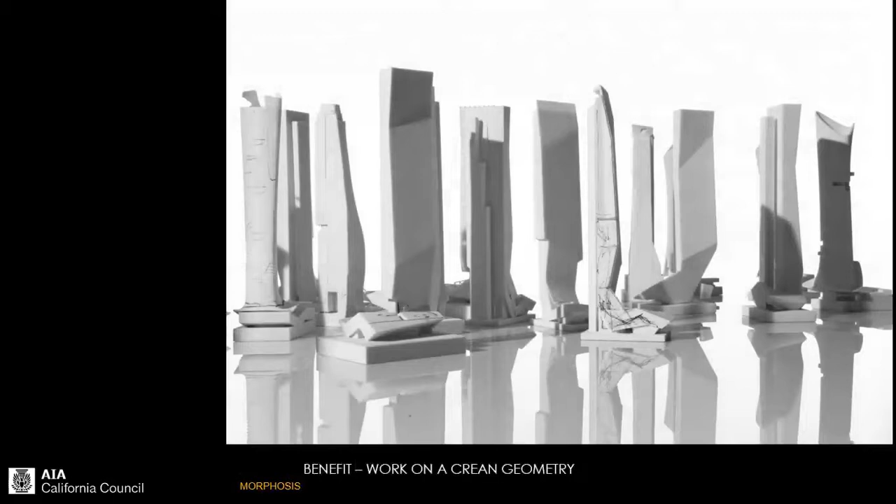So the benefit of using AECOsim Building Designer is we often produce 3D print objects. Our boss, Thom Mayne, will sketch on the 3D print so we can get more clear communication with the boss. So we are producing so many models with AECOsim Building Designer, and also the final presentation model as well.

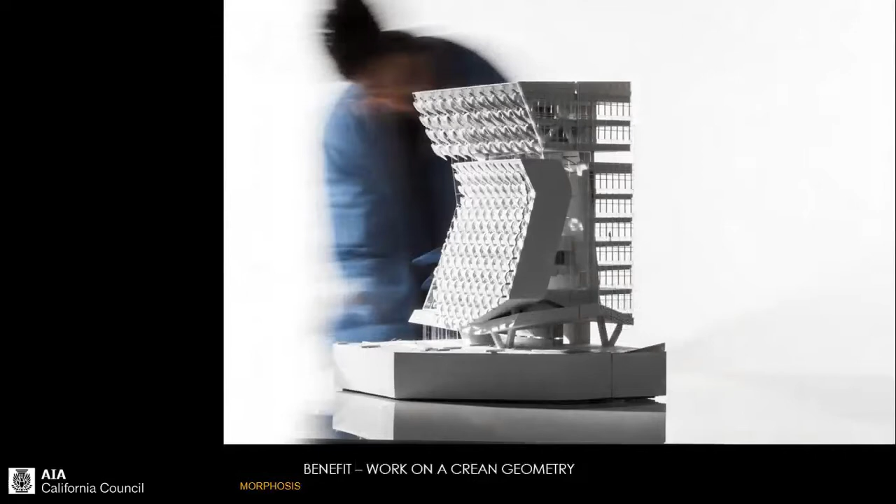And then MicroStation and AECOsim Building Designer are really creating a really clean 3D model. It's rationalized in the design as well. So it's really easy to make 3D print files. You can share easily and you can modify it.

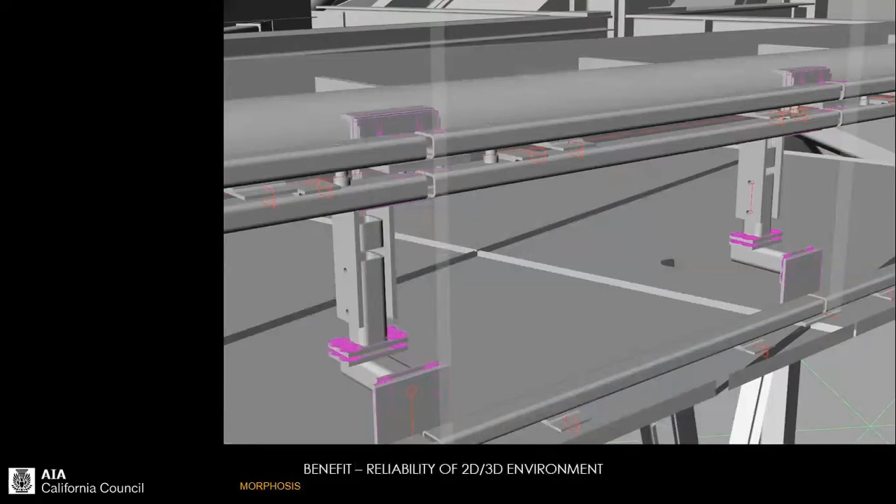So on the CA phase, we receive shop drawings and we produce those higher LOD models and then check how it's working. We are not going to build the entire building, but we do it on a certain location that we need to check. Those are the models, and that's how it's made. This project as well, we have models with different colors, ID, and this is how it's done. And this 3D information gets built.